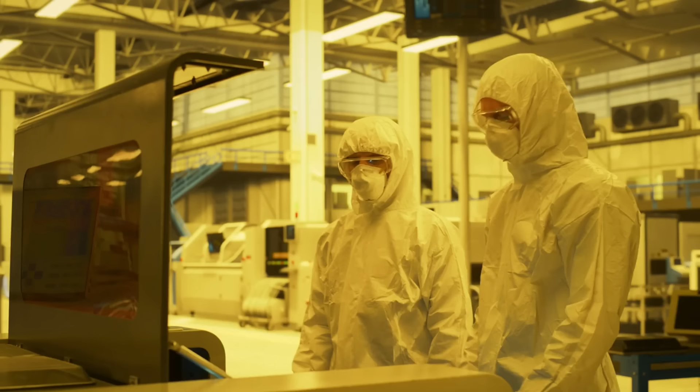A team in China just gave that timeline a new number: 2028. Not a decade. Not someday. A specific year on a specific machine that experts said shouldn't exist yet.

Here's what's actually been verified, and what ASML's 20-year monopoly looks like now.

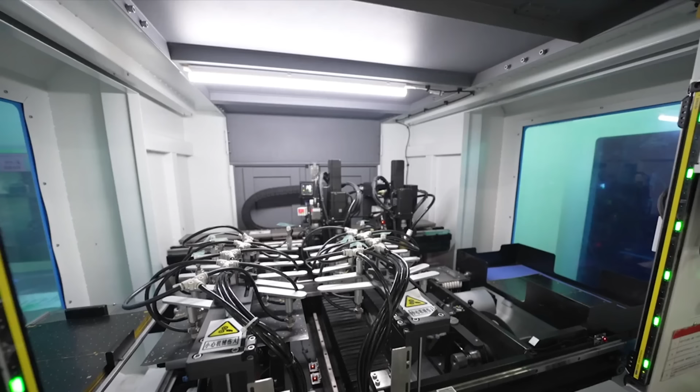Inside a secured building in Shenzhen, there's a machine that takes up almost an entire factory floor. New employees who work on it don't use their real names. Their ID cards carry fake identities, specifically so that if anyone outside that building ever asks who works there, the real answer doesn't exist on paper. And the machine they're building inside that room is something ASML's own CEO looked reporters in the eye and said would take China many, many years to even attempt.

That machine already exists. It was finished in early 2025, and it's being tested right now.

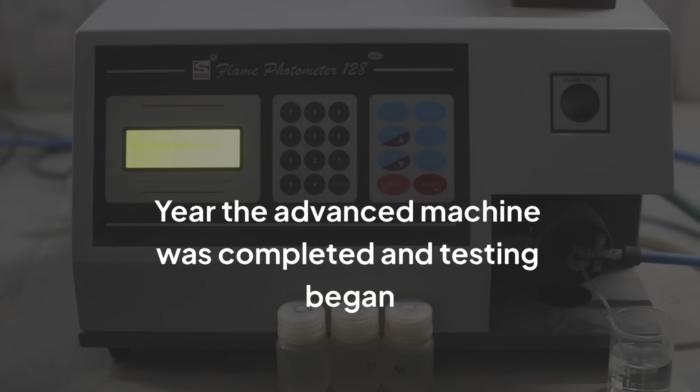This isn't a leaked screenplay. This is a real story, reported by Reuters, built on sources with direct knowledge of a classified Chinese national security program. Once you understand exactly how they built it and exactly who they got to build it, you're going to understand why this single machine might matter more than almost anything else happening in the global chip war right now. Two things are colliding inside this story that make it genuinely different from every other China catches-up headline you've seen, and almost none of the coverage on this connected them properly.

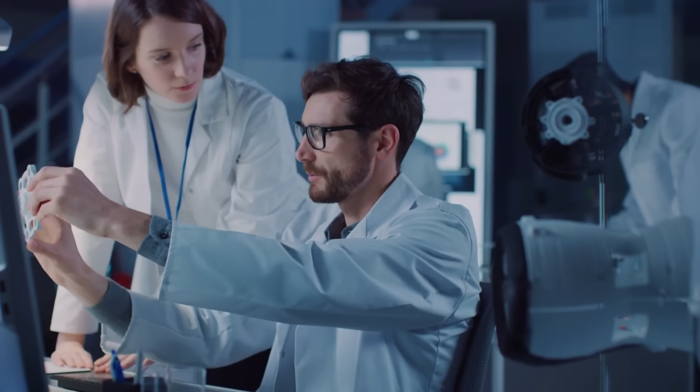Stick around, because the twist involving who actually built this machine is the part that should really stop you. I want one word from you at the end: cracked or copied. You'll know exactly which one you believe.

Let's get into it. Here's why this specific machine matters more than almost any other piece of hardware in the entire chip industry. It's called an EUV lithography system, extreme ultraviolet lithography, and it's the single most important tool that exists for making the most advanced computer chips on Earth.

It works by firing extremely precise beams of ultraviolet light through an incredibly complex optical system to carve circuit patterns onto silicon wafers, patterns thousands of times thinner than a human hair. The chips that power your phone, the servers training the world's biggest AI models, and yes, advanced weapons systems too, all depend on this exact process at the cutting edge.

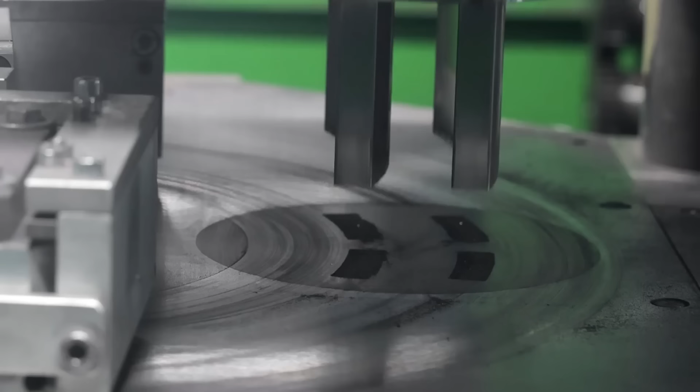For over 2 decades, exactly one company on the entire planet has known how to build a machine capable of doing this at commercial scale: ASML, based in the Netherlands. Not the market leader, not the dominant player among several competitors — the only company that has ever actually shipped a working commercial EUV machine, full stop.

Building that capability wasn't cheap or fast for ASML either. According to industry analysis, it took the company roughly 2 decades and around $10 billion in research and development, plus direct co-investment from Intel, TSMC, and Samsung, just to make EUV commercially viable in the first place. And the technology didn't even become profitable at scale until around 2018. That's the actual bar: 2 decades, $10 billion, and help from 3 of the biggest chip companies in the world, just to get one working commercial system into real factories.

That's exactly why, back in 2024, ASML's own CEO publicly suggested China was still 10 to 15 years behind on this specific technology, and why more recent public estimates from Chinese government-linked publications have talked about a production-capable tool arriving around 2030, while Western intelligence assessments have often pointed toward 2032 to 2035 instead.

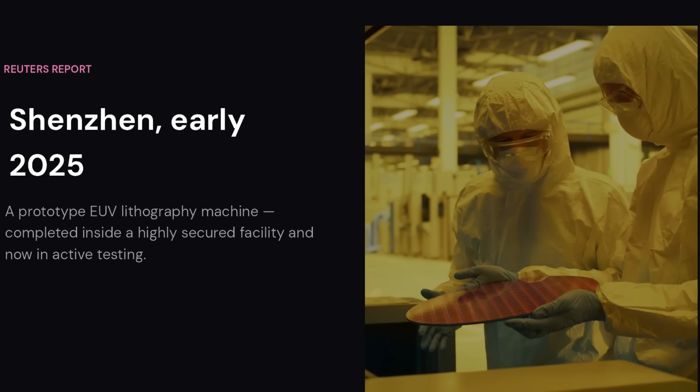According to Reuters, inside a highly secured facility in Shenzhen, Chinese researchers completed a prototype EUV lithography machine in early 2025, and it's now in active testing. The system generates 13.5 nanometer EUV light using the same laser-produced plasma method ASML's own machines use, and according to people familiar with the project, it was built by a team largely composed of former ASML engineers who reverse-engineered the company's own technology to recreate it.

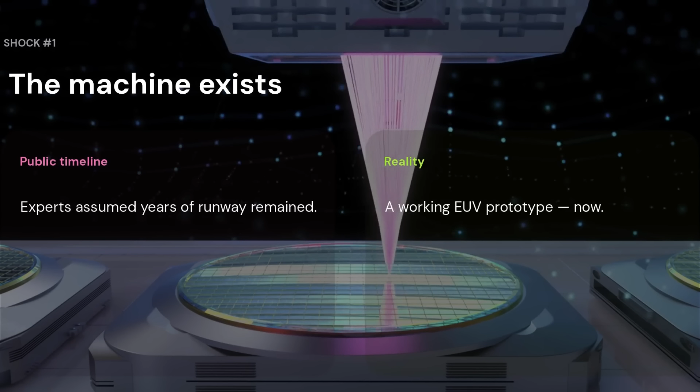Here's where the two shocks in this story actually collide, and it's the part almost nobody covering this connected properly. Shock number one is that the machine exists at all, years ahead of the public timeline experts assumed. Shock number two is exactly who built it.

This wasn't a purely homegrown Chinese engineering team working from scratch, quietly grinding away in isolation for years, the way most of these stories get told.

According to Reuters sources, China ran a targeted recruitment campaign starting back in 2019, offering signing bonuses in the range of 3 to 5 million yuan, along with housing subsidies, specifically to pull experienced optics and lithography engineers away from companies like ASML. One of the people who reportedly joined was Lin Nan, ASML's own former head of light source technology, the exact division responsible for generating the ultraviolet light the entire machine depends on.

After joining the Chinese effort, Lin's new team reportedly filed 8 EUV-related patents in just 18 months.

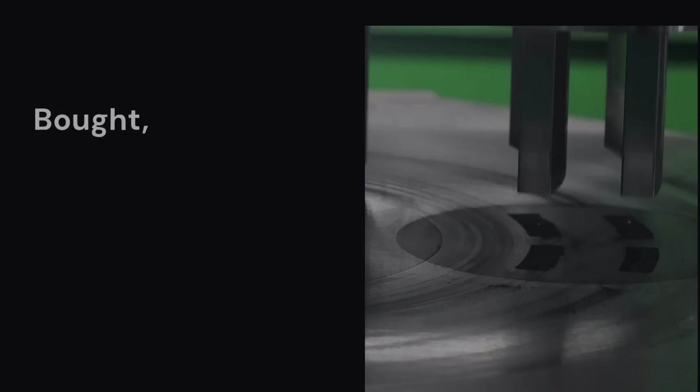Some of the people recruited into this program had spent years abroad, and sources say some naturalized citizens were reportedly issued Chinese passports, despite China's official ban on dual citizenship, specifically to bring them back into the country for this exact project. To actually build the physical prototype, the team reportedly acquired older generation ASML machines through the secondary market,

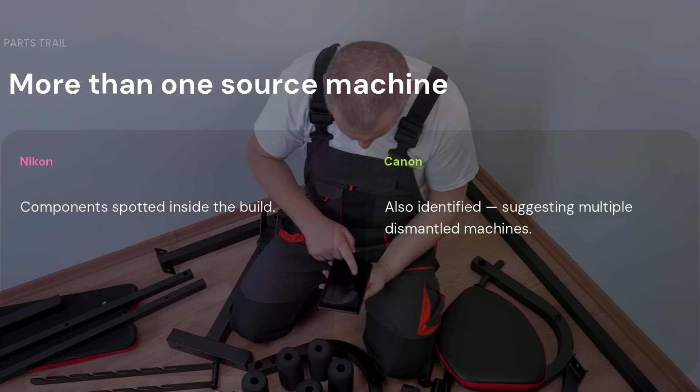through intermediaries, and disassembled them piece by piece to understand exactly how the components actually worked. Sources also mention parts from Nikon and Canon showing up inside the build, suggesting the team pulled from more than one dismantled source machine.

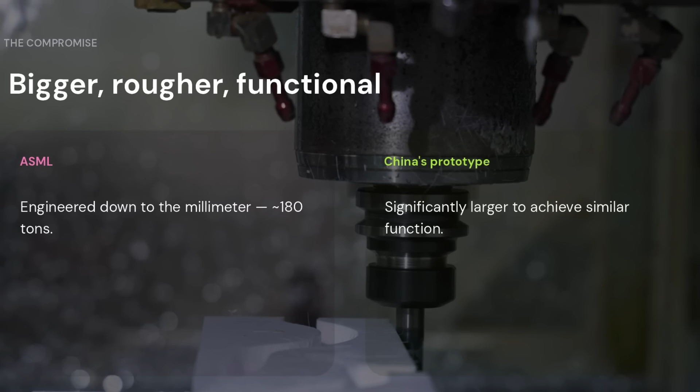ASML's own commercial systems weigh around 180 tons. China's team reportedly couldn't match that same compact engineering, so their prototype ended up significantly larger just to achieve similar function, an oversized, rougher version of a machine that's normally engineered down to the millimeter.

According to Reuters' sourcing, this entire program falls under a 6-year national initiative directly ordered by Xi Jinping, coordinated by Ding Xuexiang, one of Xi's closest allies, with Huawei playing a central coordinating role across the network of state-linked companies and research institutions involved, reportedly spanning thousands of engineers in total.

Despite China's chip ambitions being public knowledge for years, this specific Shenzhen project was reportedly kept classified as a national security program the entire time, hidden even from most people working elsewhere inside China's own semiconductor industry.

Now let's be precise about what genuinely happened here, and what didn't, because both the ASML's-monopoly-is-finished panic, and the 'it's just a rough copy that doesn't matter' dismissal are each missing real pieces of this story. Here's what's true, and it matters for keeping perspective.

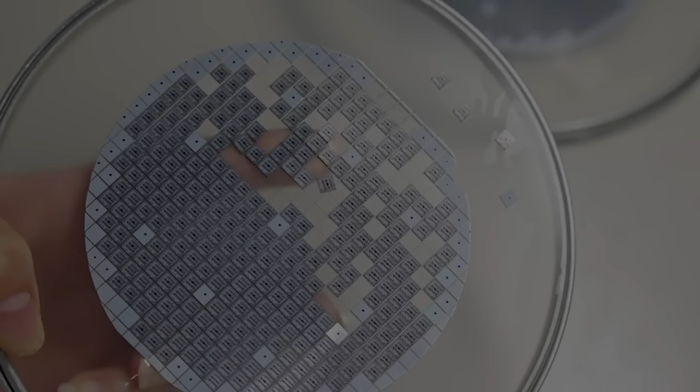The prototype, by multiple accounts, cannot currently produce usable commercial chips. It's missing critical ultra-precision optics normally supplied exclusively by the German company Carl Zeiss, optics that remain under export restriction and are widely considered one of the hardest parts of this entire technology to replicate. Sources say the light source power, the maturity of the optical subsystems, and the state of several critical mechanical components all remain genuinely unclear or unfinished.

This isn't a machine you could plug into a factory line tomorrow and start shipping chips out of. It's closer to a proof of concept that the fundamental physics and engineering can be replicated at all, which is a real milestone, but a very different milestone than commercial readiness.

China's own internal target is reportedly to have working prototype chips by 2028. But Reuters' own sources inside the project say 2030 is the more realistic date.

ASML itself responded to the reporting with a fairly pointed statement, saying it's natural for companies to want to copy their technology, but that doing so isn't easy.

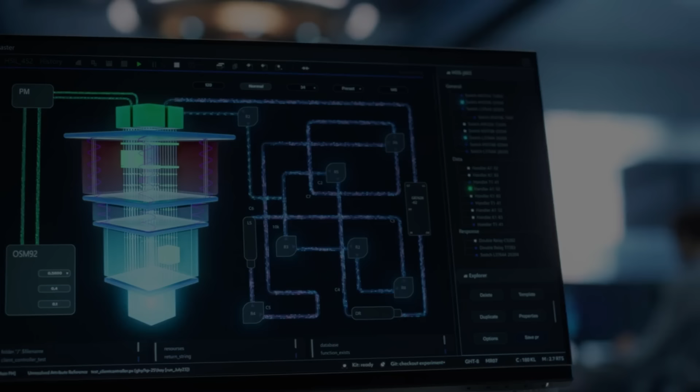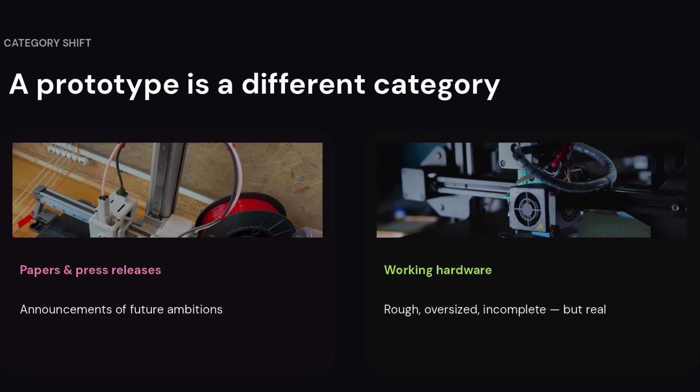But here's what genuinely justifies taking this seriously anyway, instead of just dismissing it as an unfinished science project. A working prototype, even a rough, oversized, incomplete one, is an entirely different category of achievement than a research paper or a government press release about future ambitions.

This is physical hardware, generating real EUV light at the correct wavelength, sitting inside a real factory floor, being tested right now. The gap between having something that technically works in a lab and having something that reliably produces commercial chips at scale is genuinely enormous, and it took ASML the better part of a decade to close that exact gap, even after its own machines were technically functional.

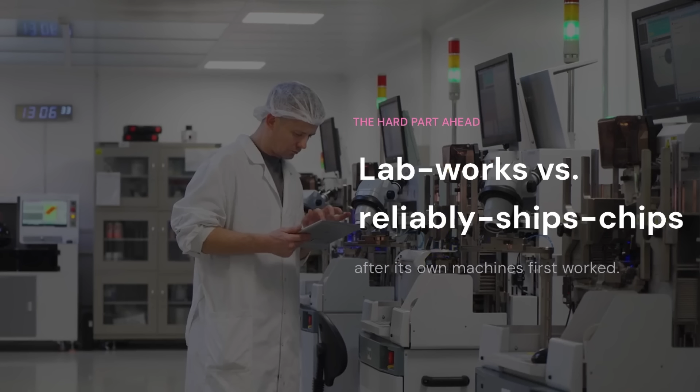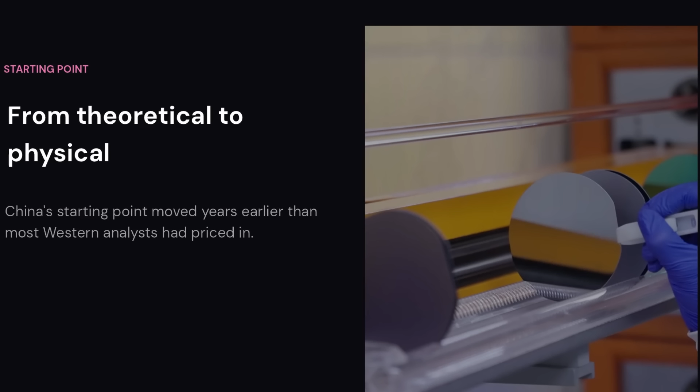But the starting point matters enormously too, and China's starting point just moved from theoretical to physical years earlier than most Western analysts had priced in.

Think about it this way. In 2024, the honest consensus among most Western analysts was that a working Chinese EUV prototype was still a distant, uncertain someday. As of this report, it's a machine sitting in a specific building with a specific completion date, being tested by a specific team whose names, minus the fake ones on their badges, are now at least partially known.

There's also a genuinely serious angle to this story that goes beyond engineering entirely. Dutch intelligence services warned in an April report this year that China has run extensive espionage programs specifically targeting Western technology and knowledge, including what they described as recruiting Western scientists and employees directly out of high-tech companies.

Reuters reported it could not determine whether any legal action has actually been taken against the former ASML employees connected to this specific program. ASML, for its part, says it protects its most sensitive EUV knowledge internally by restricting access to only a select group of employees, even inside its own company.

Whether that internal safeguard actually held up against a coordinated, state-backed, multi-year recruitment campaign is exactly the uncomfortable question this entire story raises. In response to concerns exactly like this one, the Dutch government has reportedly begun actively screening research institutions and technology transfers specifically to prevent sensitive semiconductor knowledge from leaving the country.

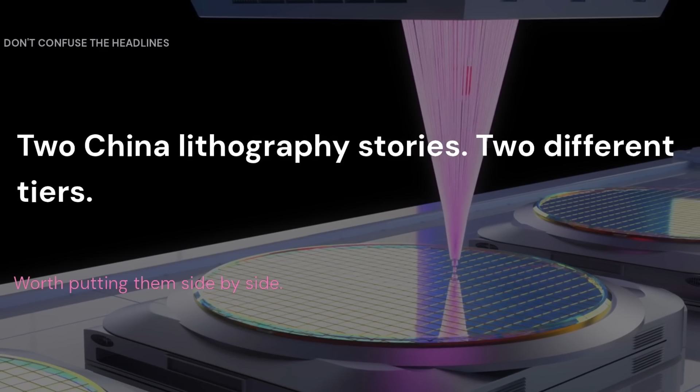It's also worth putting this story next to the other major China lithography headline that's been circulating this year, because the two are easy to confuse, but represent genuinely different tiers of the same industry.

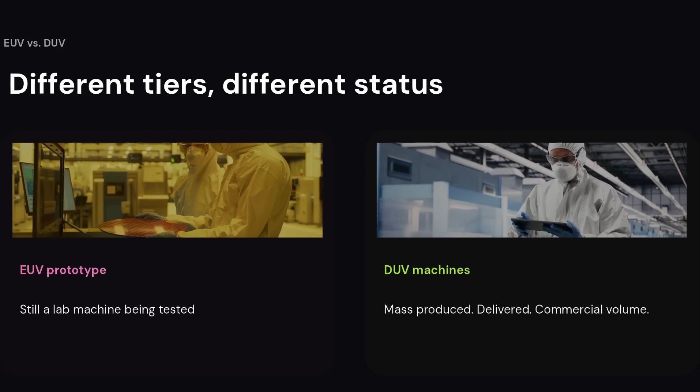Separately from this EUV prototype, Chinese firms have already begun mass-producing and delivering DUV lithography machines, a less advanced category of equipment, to real chip factories at real commercial volume. That DUV progress is confirmed, public, and already inside working factories today.

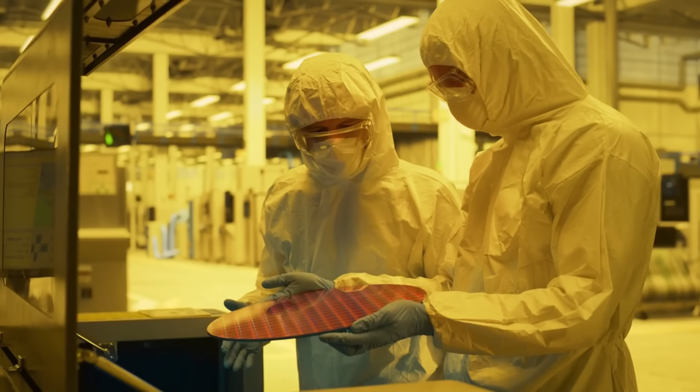This Shenzhen EUV project is a completely different, far more advanced tier of technology, still stuck at the prototype stage, still missing critical components, and still years away from any equivalent commercial reality. Confusing the two makes China's overall position look either far more advanced or far less advanced than it actually is, depending on which story you happen to hear first.

So, where does this actually go from here? Watch whether China's Shenzhen team can actually source or domestically replicate precision optics anywhere close to what Zeiss currently supplies ASML. Because multiple experts specifically flagged that piece as the hardest remaining barrier, not the light source itself.

Optics at this level require polishing mirrors to a smoothness measured in atoms, a manufacturing discipline Zeiss has refined over decades, and reverse engineering that particular piece is a fundamentally different challenge than reverse engineering a laser chamber.

Watch the 2028 versus 2030 timeline gap closely too, because whichever date turns out closer to reality will say a lot about how much this recruitment strategy genuinely accelerated things versus how much distance remains.

And watch how the Dutch and American governments respond on the counterintelligence side. Because if this story confirms that experienced engineers can be recruited out of a company's most guarded division and used to reverse engineer its core technology within a matter of years, that changes how every advanced technology company on Earth has to think about protecting its own talent, not just its patents.

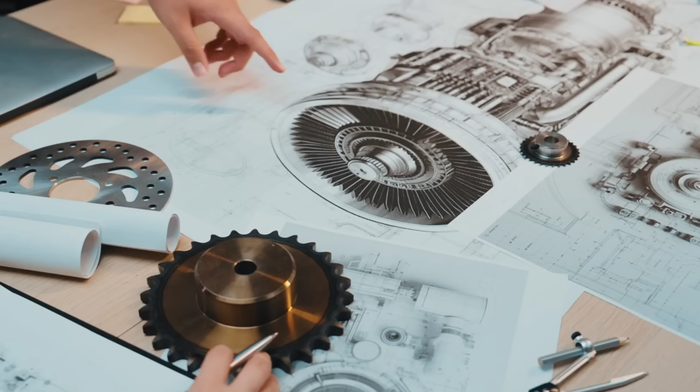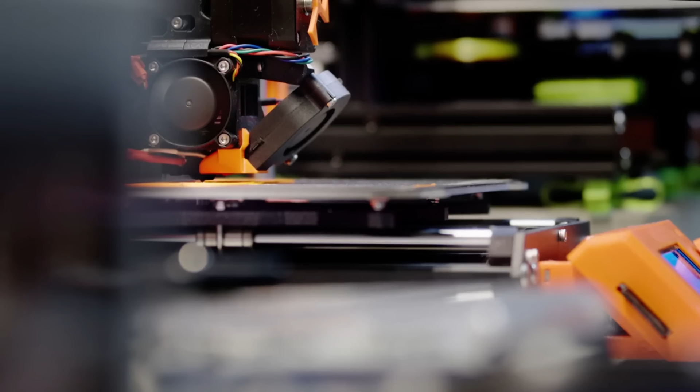Let's bring this together, because individually these are just details, but stacked on top of each other, they describe something genuinely significant. One prototype machine, completed in early 2025, years ahead of public expectations. 10 to 15 years. How far behind ASML's own CEO publicly said China was back in 2024.

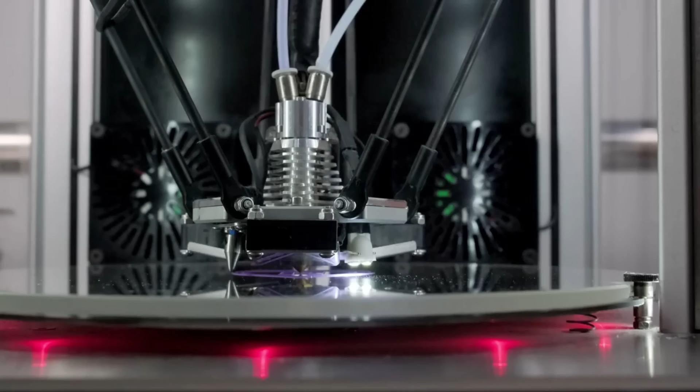2 decades and $10 billion. What it actually took ASML to build this technology the first time. 6 years. The length of the national program Xi Jinping reportedly ordered to close that exact gap.

3 to 5 million yuan. The signing bonuses reportedly used to recruit engineers straight out of ASML. 8 patents, filed in 18 months, by a team led by ASML's own former head of light source technology. 180 tons, the weight of ASML's real machine, next to a Chinese prototype too oversized to match it.

2028 versus 2030. China's internal target against what Reuters' own sources call the more realistic date. Individually, these are just facts about a lab in Shenzhen and a recruitment campaign that started 6 years ago. Together, they describe a monopoly that took 20 years and $10 billion to build, being challenged by a machine built substantially faster, using the exact people who helped build the original.